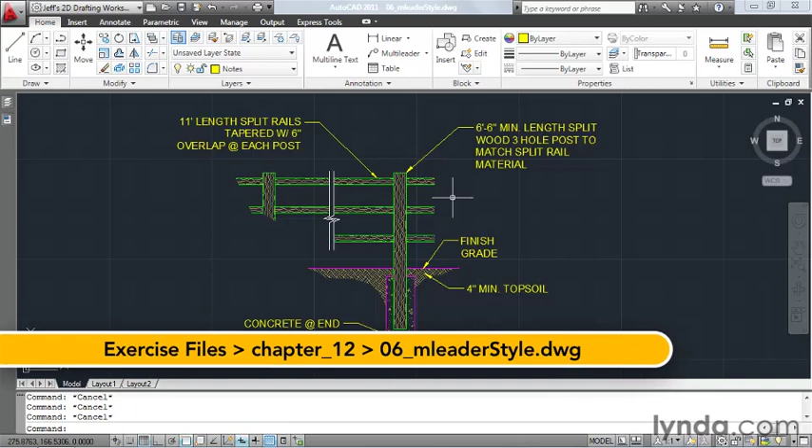On my screen, I have a detailed drawing, and this drawing contains several multileaders. Let me mention that all of the leaders in this drawing were created using the default standard multileader style. Let's take a look. I'm going to click to open up the annotation panel, and right here, I can see the name of the current multileader style. It's called standard. All drawings start with a standard multileader style.

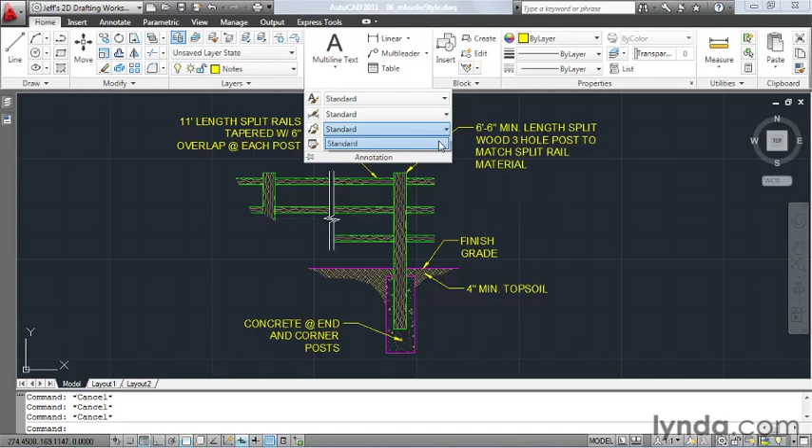Just like text and dimensions, you need to have at least one style to create multileaders. If I click this flyout, we can see that standard is the only style in this drawing. If I'd like to make changes to this style or create a new multileader style, I'll click the multileader style icon. This brings up the multileader style manager.

Notice this looks very similar to the dimension style manager. In fact, it works the exact same way. Right here I can see the name of the current style. On the left side I can see a listing of all of the multileader styles that have been defined in this drawing. Using these buttons on the right, I can set a style current, I can create a new style, I can modify an existing style, and I can delete a style.

Notice that the delete button is grayed out right now. That's because I only have one multileader style in my drawing. Now, since I have already created several multileaders in this file, I'm not going to create a new style right now. Instead, we'll make changes to the existing one.

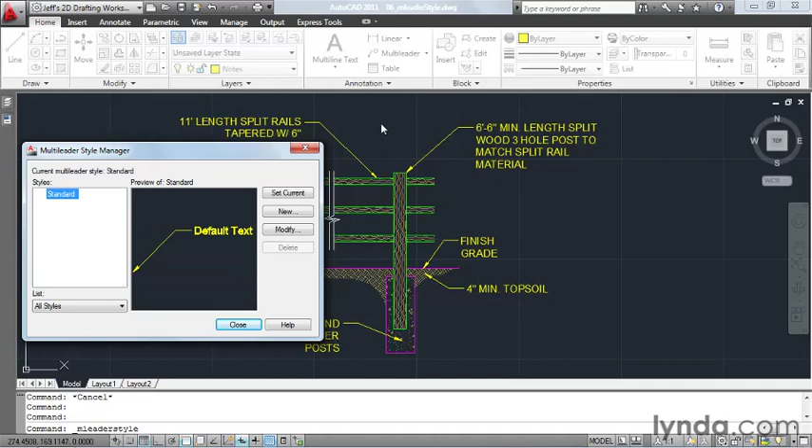If you did want to create a new style, you could click this new button, and right here is where you could give the style a name. And just like with a dimension style, your new multileader style will start using the settings from an existing style.

I'm going to click Modify, and notice that multileader styles have far fewer settings than a dimension style. That's because there isn't as much to multileaders. Essentially, we have settings for the leader format, leader structure, and content.

Now, we're not going to be going through all of the settings in this dialog box. One great place you can go to learn about multileader settings is this hyperlink right down here. If you click this hyperlink, AutoCAD will give you more information about the concept of multileaders and their styles. For information about specific settings, simply hover over it, and AutoCAD will give you a more detailed description.

And don't forget about this preview. This is a nice visual cue of what the style will look like. If you have questions about a style setting, change it and see how it affects the preview.

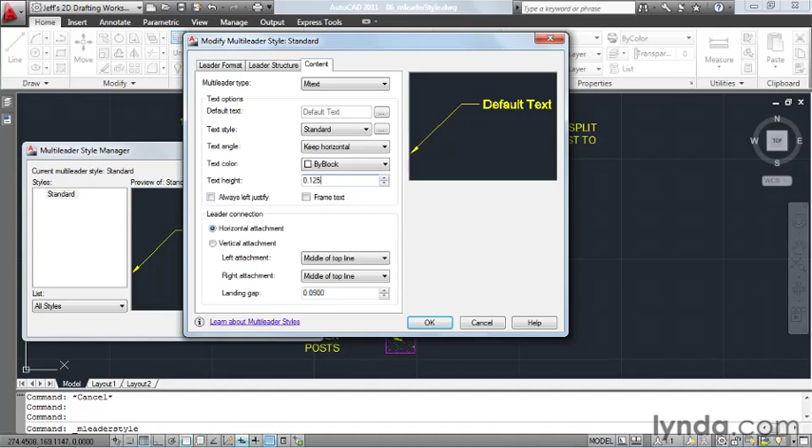I'm going to start by changing the text height. Currently this is 0.18. I'm going to make this a little smaller. I'll make it 0.125. Then I'll press OK, and I'll click Close. And notice how all of my multileaders are conforming to the new settings.

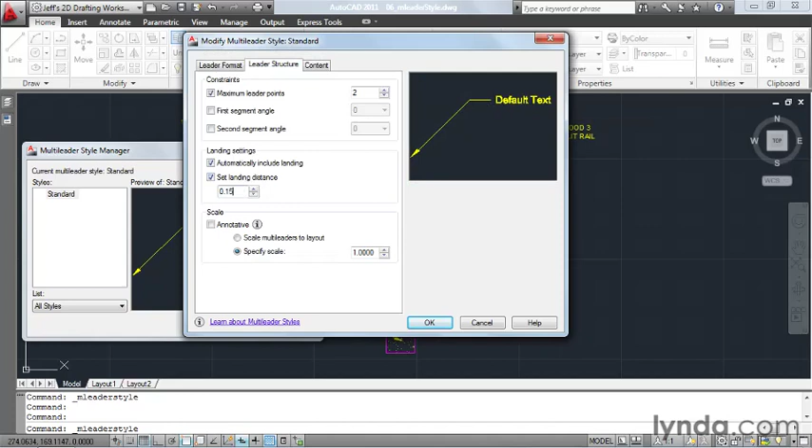I'd like to make one more change. Let's go back to the Multileader Style Manager. I'll click Modify, and I'm going to click on the Leader Structure tab, and I'd like to adjust the landing distance. Right now this is set to 0.36. This guy is controlling the length of this line. I'm going to highlight this value, and I'll change it to 0.15. I'll press Enter, then I'll click OK, and Close.

As you can see, multileaders hold to the same principle as text and dimensions. Their appearance is controlled by a style, which standardizes their look and makes it easy to make global changes.